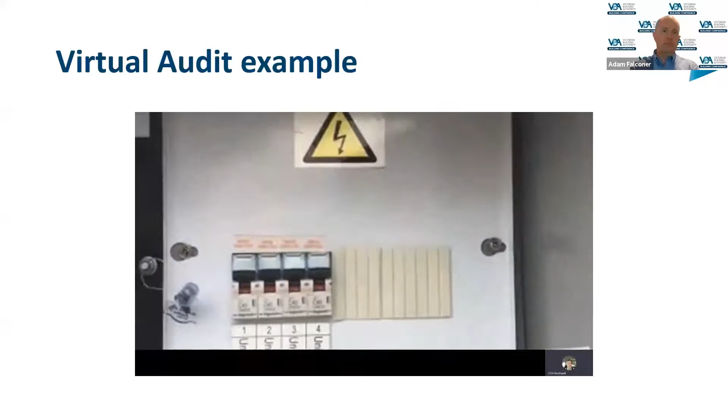Good morning, I'm Clint, the plumbing inspector, and you are? I am Christian. Just down a bit, up a bit, there we go, like that. Tilt the camera back a tad. Okay, gotcha there. All right, Christian, thank you, beautiful. Just to confirm the street address where we are - tilt your camera up a little bit. Yep, 11 Sweeney Drive, so we're looking at 4 units total on site by the looks. Okay, and you were saying you've done the stormwater, we can have a look at that first if you like. You've got a few pits down the driveway, have you? It's there, yep.

A little bit hard to see how they're formed. Yep. So is there any stormwater retention systems in these? There is, yeah.

Just a small one. See down there, we've got a 375 and a couple of links of 300 going upstream. You've got the retention pit up here, going towards the back. Yeah, that's it, basically. Barrel's at the back, yeah.

There's a trash grate there, and a plate and orifice through the baffle wall. And then it goes out here. That's pretty much it for that one.

I know you haven't done the sewer yet, but was that sewer or stormwater PVC in the little shed on the ground? Oh, that's the sewer cap, I believe. Just put your camera down so I can see that. Yeah, just there. So that's the main sewer point for the property.

Yeah, I believe so. I can't get that off, I think it's glued on. So is it a glued cap or a screwed cap, that one? That one's just a glued cap at the moment, yeah.

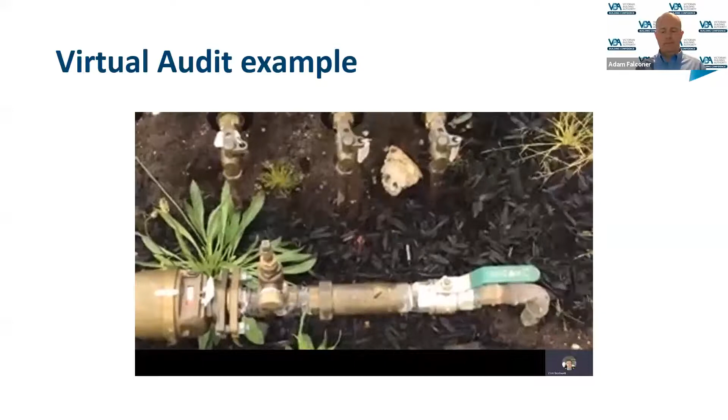Just tilt your camera down slightly so I can see that. Down, down, down. Okay, so one dual check onto your property water, and then the individual water meters.

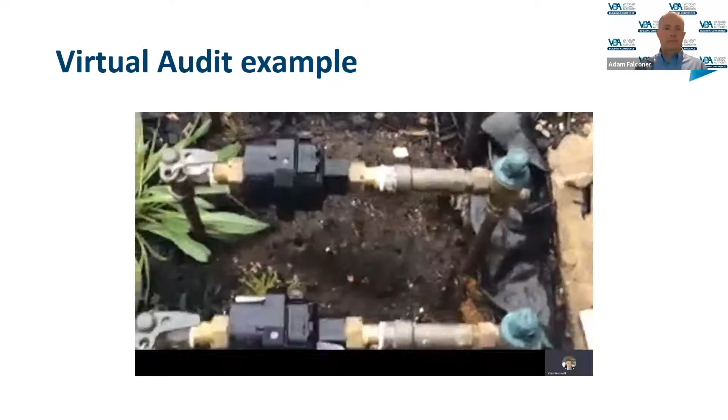Yep, dual check and a 500 kPa limiting. Have you got tags or ID on them by the looks on the handles? Yep, you see them? Unit 3, 2, and 1. Okay, yep, that's good.

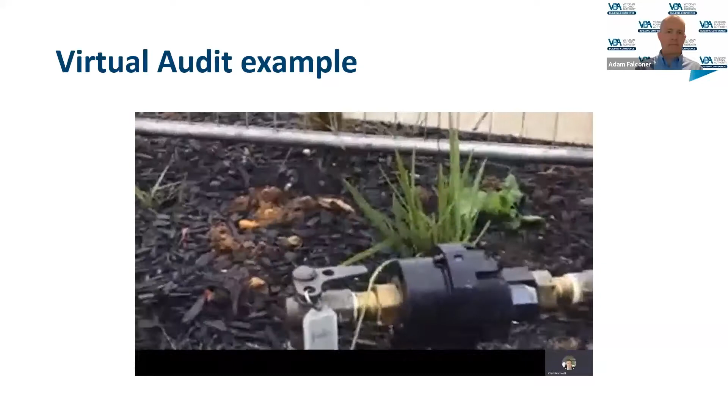Any water standpipes out the front? Any water tap out the front near the meters? No. Okay, that's fine. Can you let me know is that a good angle?

Yeah, I can see that. So you've got that on screen, 3 kPa in it.

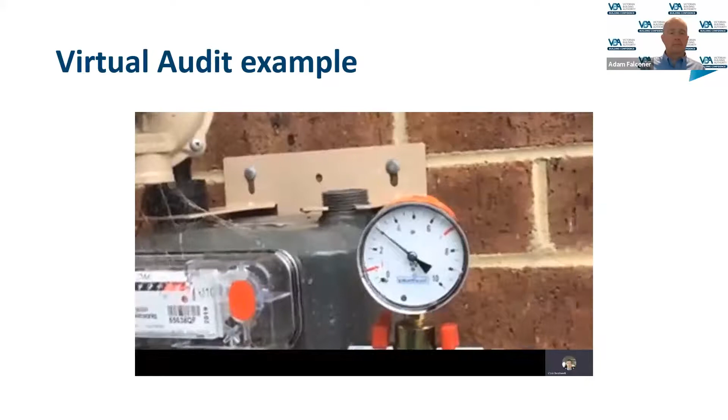If you just go back a little bit, just so I can see the testing tee and everything in place. That's it, just there. All right, so you've got a meter support bracket in there.

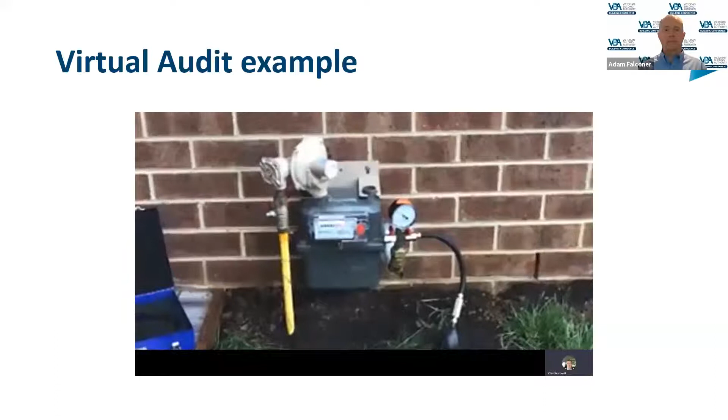I'll get you to go around sideways so I can see the plastic they've sleeved the pipe in. Just down a little bit, thanks. Just there, okay. And another one head on.

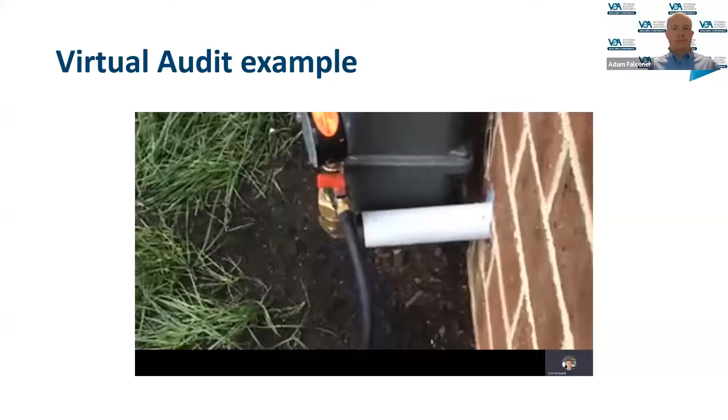I'll just have a look at it from front on where you were before. I'm just taking a couple of screenshots at the moment. You're right, just back a little bit if you can. Tilt your camera up. That's it.

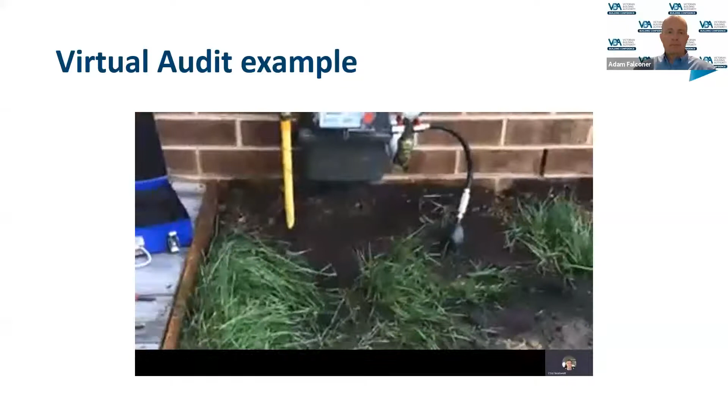Okay, thanks Christian. So you're happy with that test? Yep, looks like it's great, it's not moving.

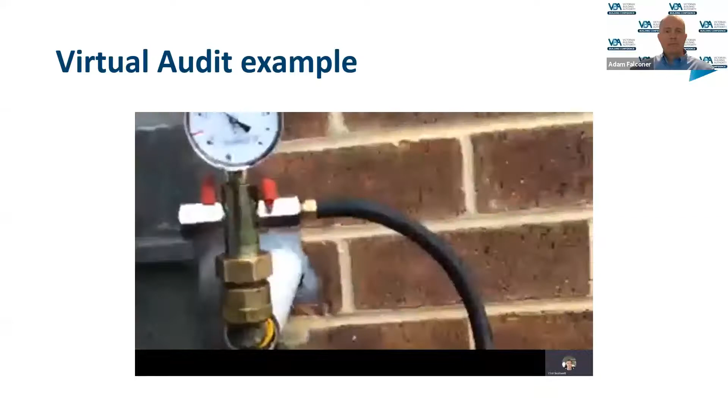Can you see that? Okay, so look, with that gas line, you said someone else has done the roughings here, gas and water. Yeah, that's correct, that's right.

And you haven't run any gas line? No, I haven't touched or installed any appliances, no gas line at all. Okay, no, all right.

If you like, you can head around. So we're looking for the ORG points, your hot water unit, anything outside, gas barbecue points if you want to walk around the outside, rainwater tanks. Actually, I'll show the ORG, it's just around here.

So are they charged by fixtures or taps? Yeah, fixtures. So this one's charged by the sink, it's just here, but it's not fitted off.

Okay, so if you go back a little bit and just tilt your camera down. Okay, so that's an ORG. Do you want to just pop the cap off so I can see if there's a water seal in it, if that's fine? Give us 2 seconds.